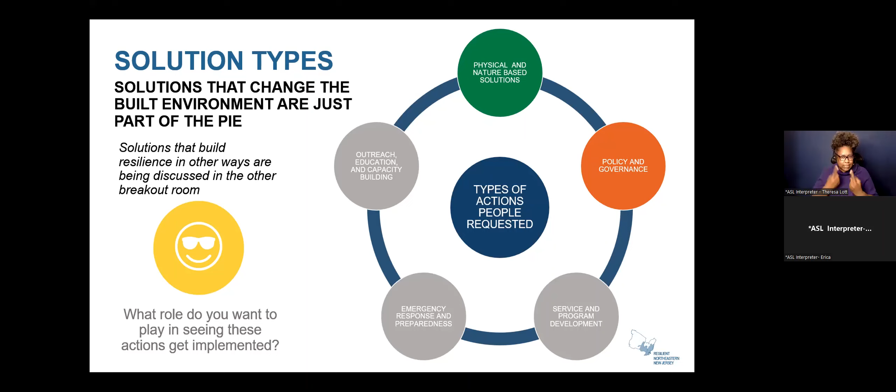You'll see here, we'll come back to these questions as we're moving through, but these are some of the prompts we have for you in terms of feedback and how we can further refine the recommendations moving into this action plan.

We want to know, does the stuff we've come up with jive with your vision of what a resilient future looks like for our region? Is there anything glaringly missing? Did we not hit the mark somewhere and you really want to name it for us? Hey, you really don't seem to have said X. Please name those things for us.

In some instances, they could be addressed somewhere else, and we want to assuage your concerns that we have identified those challenges as well in our analysis. What do you think is most important? What should we prioritize? And are there other areas where you have concerns about implementability, feasibility, cost, etc.? Next slide.

And so at this point, I will turn it over to Greg and Russ to share a little bit about how we are framing up these collections of solutions in the built environment space. Thank you.

Yes, thanks, Natalie. And thanks to everyone for joining. As Natalie said, we want this to be a very collaborative event tonight, an extension of the collaboration we've seen over the past year plus on this project itself.

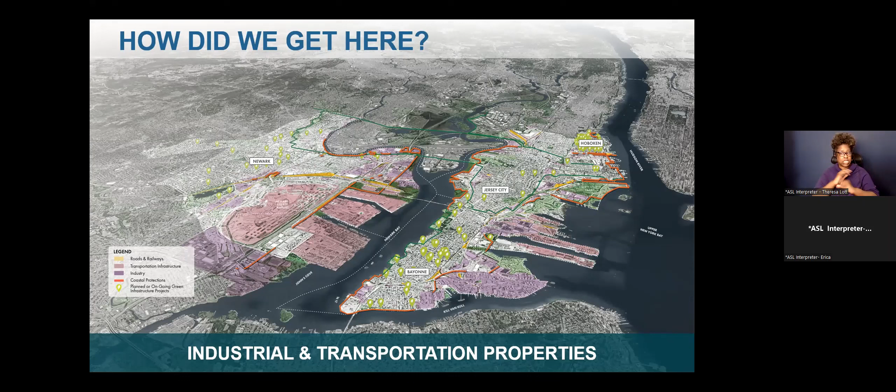What really comes out to us is that we have a lot of sections of the waterfront that are industrialized. Not only is transportation a really important aspect of this area, as Yasmin mentioned, but a lot of the properties along the waterfront historically have been industrial and remain in industrial and critical infrastructure uses today. That really influences not only how we think about protecting that area, but where we place that protection. Next slide.

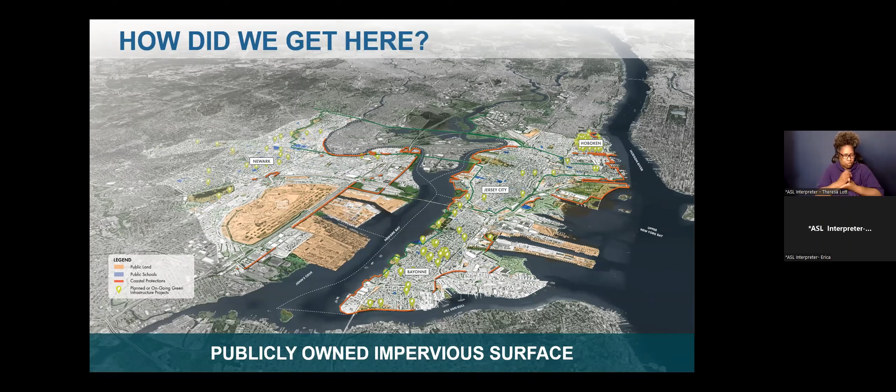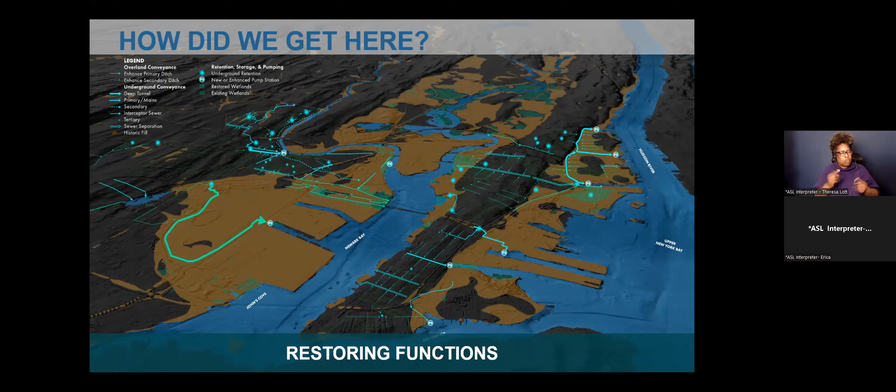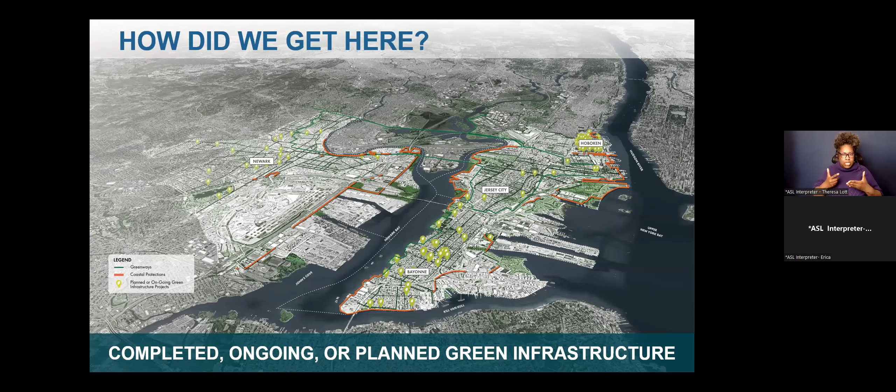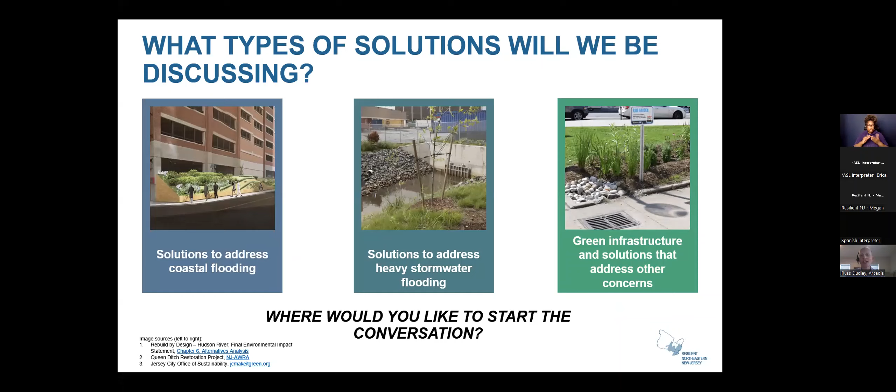Next slide. So what are we talking about today? Up to this point, through our other community meetings, we have talked about solutions oriented around three primary categories. We're responsible for addressing flooding holistically, and as mentioned before, that involves coastal flooding due to storm surge or sea level rise, but also stormwater flooding and groundwater flooding. So we'll be talking today along these similar lines: coastal solutions, drainage solutions, and green infrastructure.

At this point, I'll pause to allow a space to change if needed for interpretation, but also to give everyone a chance to choose where we start in this discussion.

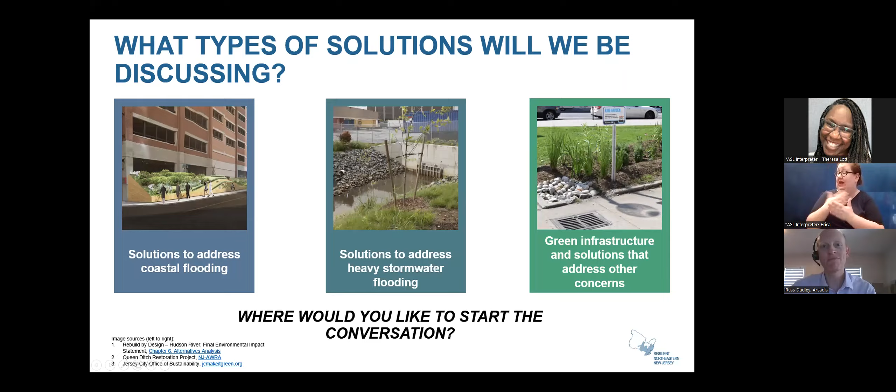Great, wonderful. So I'll kick off this discussion about our drainage solutions, and stormwater is certainly an important element of our resiliency plan, one we've spent a lot of time looking at and talking about. The visioning report kind of helped frame the types of solutions that we wanted to see throughout the region, but the risk assessment that we did as well, which will be presented shortly on the website, was a key element of identifying solutions for addressing stormwater flooding.

Stormwater flooding, as you all know, is particularly challenging because of the frequency and the geographic distribution of that flooding. It happens everywhere, and based on a lot of the storm events we've seen recently, especially from Ida last year, but also some storm events we've already seen this spring, it has resulted in localized stormwater flooding. So it certainly presents a specific challenge for us through this project.

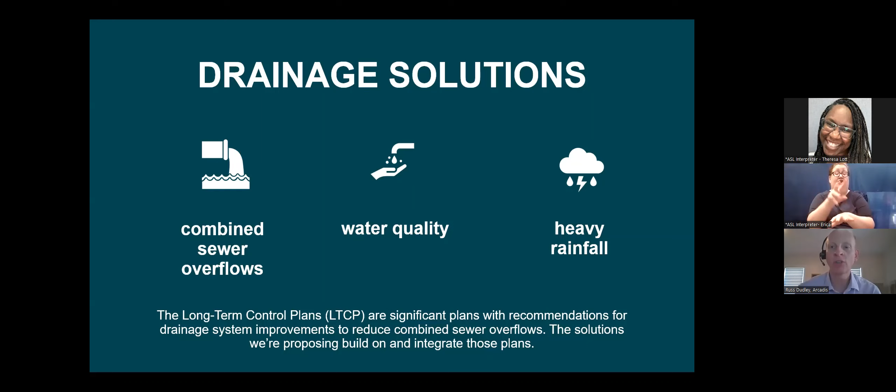Also, there's a lot of actions being taken for drainage solutions in the area. A lot of this is based around water quality, addressing combined sewer overflows. And there are currently long-term control plans that have been developed for the region to reduce these combined sewer overflows, which we have factored into our plans as well.

So let's start, Greg, by going through some of the drainage solutions. This is the draft recommendations as it relates to drainage specifically. You'll see all the solutions presented here, but we will work to step through these individual key actions to help describe this in more detail. And as it relates to some of that terminology we presented earlier, you'll see ease, protect, and connect as key elements as part of our draft recommendations.

So to begin with, this is how we're going to present our actions in our different categories. We have broken these out by similar actions, and we'll start by talking about separating stormwater to safe and dedicated outfalls. We looked for opportunities to get water out of the combined sewer system, with the understanding that a majority of our region is serviced by combined sewers that handle both stormwater and wastewater. These sewers are old and have varying capacity, and it's difficult for a lot of these sewers to handle the rainfall.

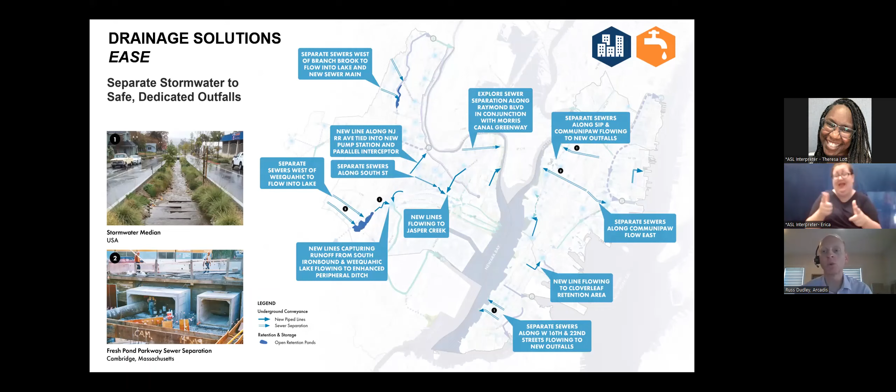So yes, this is an area where we were looking at the opportunity, and for a lot of these sewer separations, they're only beneficial if we can get water out of the system. That's why you'll see these areas being directed to the coastal areas. There's obviously a lot of infrastructure that we need to work around within these areas. So as it relates specifically to that area in Bayonne, taking advantage of the large right-of-way within those transportation corridors to potentially build in retention to those cloverleafs to help mitigate the amount of stormwater infrastructure needed to get water out. That's a theme of ours as we look at these types of projects. It's very similar to using the larger retention at Branch Brook Park, for example, to help mitigate those peak flows and allow us to get water out a little bit more efficiently as it relates to built infrastructure. So I hope that provides a little bit of clarification about that project specifically.

Just to reiterate, these have not been designed. We are still at a very much a planning level process, and some of these are intended to really kick off that conversation. A good example here are these deep tunnels. We know they can be disruptive and very expensive, but in some areas they'll provide a lot of benefit where we don't have many other great solutions to manage stormwater. One key element is a drainage corridor spine along the backside of Hoboken as well as Jersey City downtown, where a lot of flooding is occurring. These are examples of deep tunnel solutions that can help us manage stormwater and get it to places where it can be pumped out more effectively.

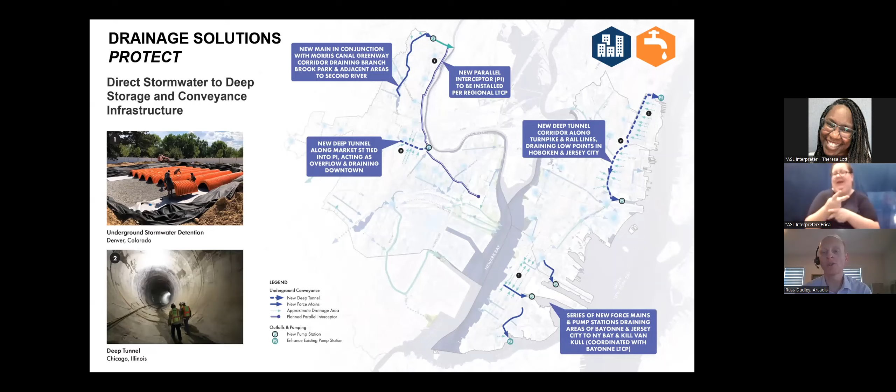Faith asked specifically whether those deep tunnels were combined or separated. In most cases, they'll likely be combined, taking advantage of the existing combined sewer where we can alleviate some of the capacity limitations within the combined sewer system. We'll also be able to store that water temporarily and then pump it back into the interceptor, for example in Newark, for treatment. Where we can, we'd love to separate that stormwater and get it out of the system completely, but there are other benefits of maintaining combined sewer tunnels from a water quality standpoint as well, so it does vary a little bit.

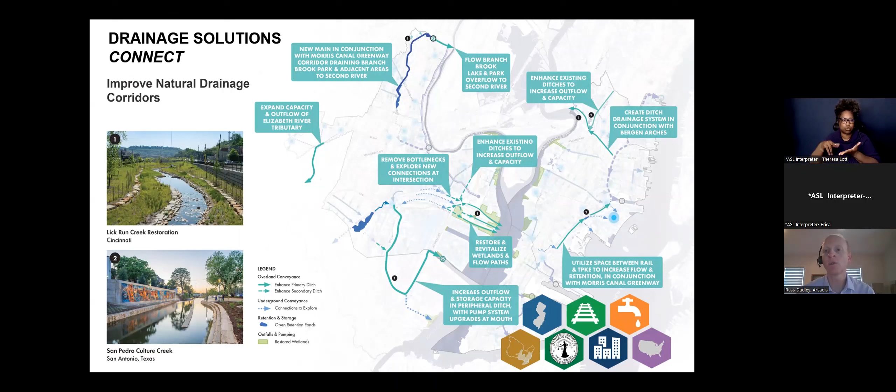To quickly move through these other drainage solutions, the next action we've identified where there's some really good opportunities is improving the existing drainage corridors throughout the area. There are a number of these around Newark, especially around Ironbound, where there's a large ditch system, as well as the peripheral ditch around Newark Airport. Improving these natural conveyance channels will allow us to get water out of those areas more effectively, and to identify existing barriers to flow and try to open those up to improve conveyance. This is perhaps a little more limited in Jersey City and Hoboken, but we want to take advantage of existing right-of-way and transportation corridors to identify open channel conveyance solutions that can move stormwater out of these areas to alleviate flooding. We'll talk about that more as it relates to the Newark Bay Hudson extension of the New Jersey Turnpike, but these are some solutions that allow us to leverage and improve those existing drainage corridors.

Adam spoke to an innovative idea to repurpose an underground parking lot. There's going to be a big need to identify lots of different regional retention sites throughout the area, so we often look at public properties and large parking lots to begin with for these types of practices. A good example is the Ironbound Resilience Hub, which we've advanced through a FEMA BRIC application as part of this program, where we incorporated a significant amount of stormwater storage within the Ann Street School in Newark, combined with solar power infrastructure there to create a resilience hub.

So I quickly moved through those solutions. I know we're a bit time limited, but Megan, I don't know if you've been tracking the comments, if there's any questions we should pause for.

This might be a good time to circle back to some comments that Lenny was making. Lenny, I wonder if you're able to unmute yourself and share some of your thoughts. To summarize briefly, there was a question about how regulations related to development, particularly in redevelopment zones where you can have stronger rules, and whether there was a way to use that system. It's a question for Russ and Greg, because this is the physical breakout session and we're talking about governance solutions that allow for physical breakouts, or are things around land use and redevelopment laws specifically being discussed in the other breakout?

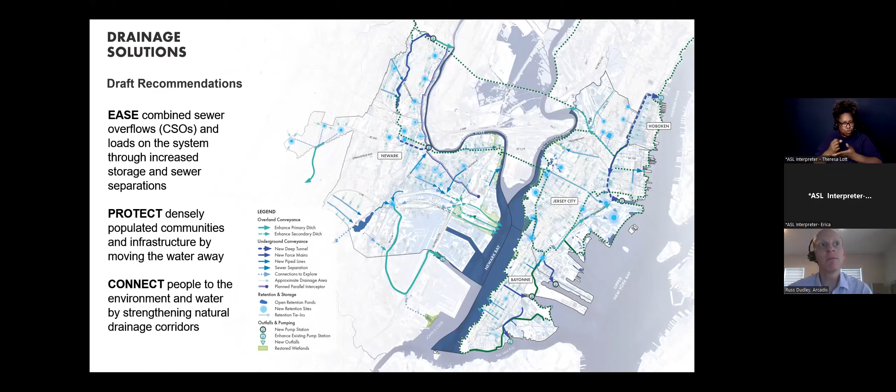In the interest of time, we can circle back to some of these comments, but for those who need to sign off potentially here shortly, maybe Greg, you can talk about some of the green infrastructure solutions and approaches that we've taken.

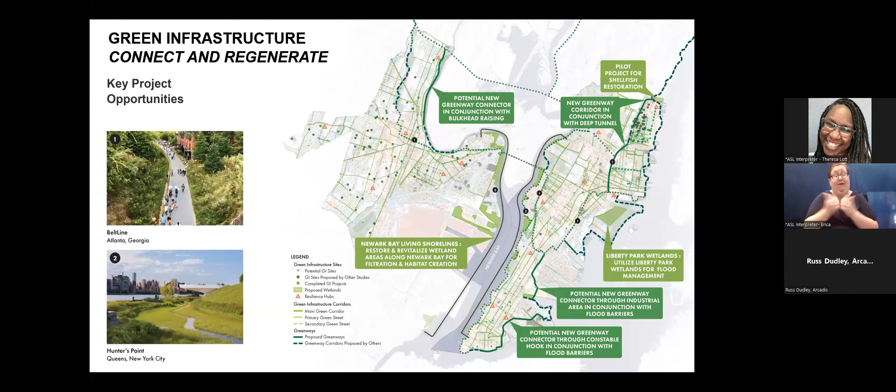So the way we're looking at how Northeastern New Jersey can help with green infrastructure projects in the region is by identifying areas where these projects can have impact. I'm going to step through a series of maps that outline different inputs we've identified that can help both site and develop green infrastructure projects going forward.

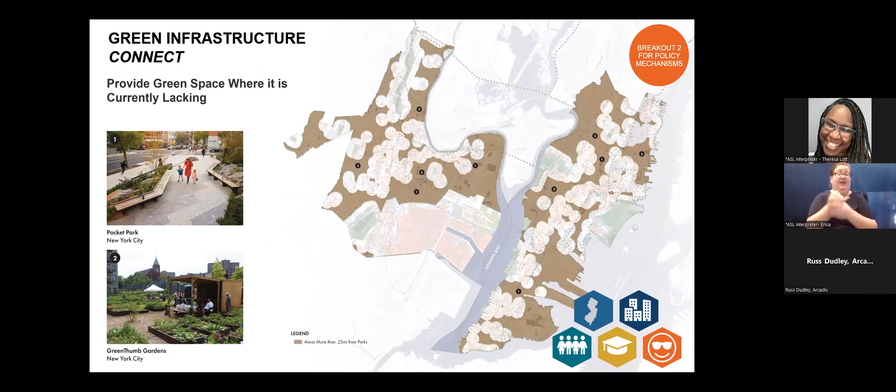One of the main factors we look at is how far people are from existing parks and open space. We generally consider a quarter mile radius to be a feasible walking distance to a park. As you can see on this map, the brown areas represent where people are more than a quarter mile from an existing park, so where an intervention can have a greater impact on access. Though space might be limited in some of these areas, we see interventions like pocket parks, community gardens, and public-private open spaces helping to fill some of these gaps.

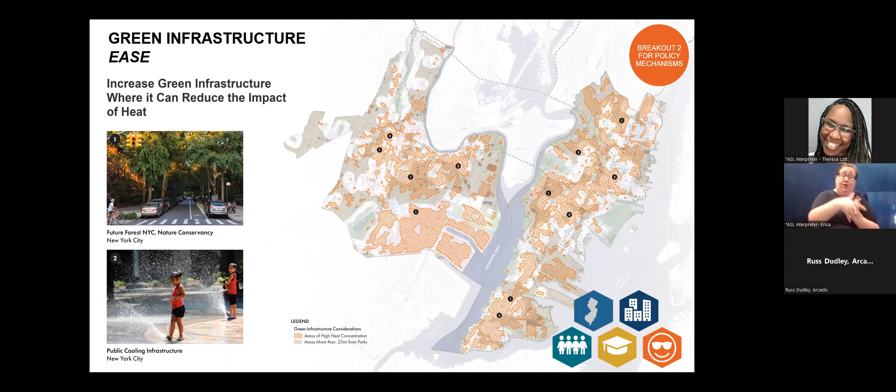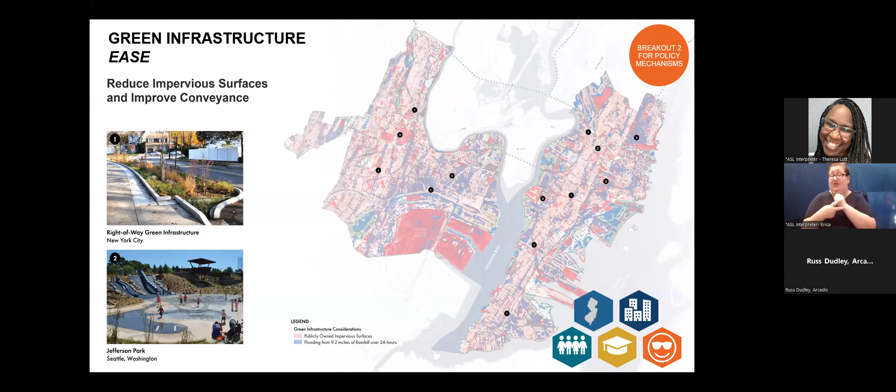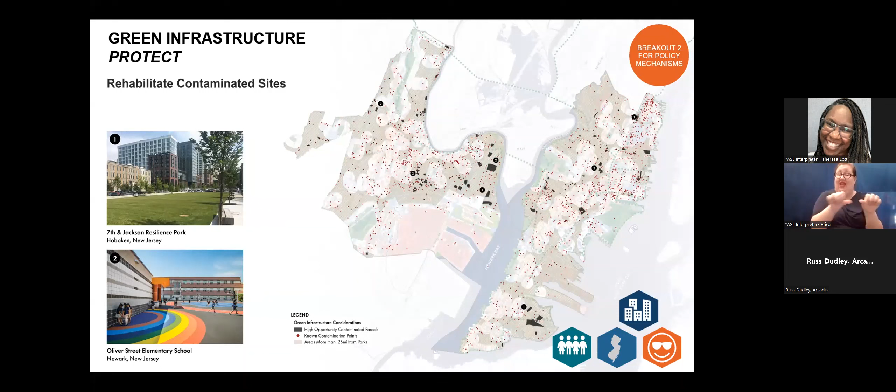So I guess at this point, 3 minutes over, I can open for comment. I have seen a few going through the chat. Are there any that have risen to the top? Yeah, I've been looking through the chat as well while Russ was speaking. Any questions on the green infrastructure solutions and approaches that we've outlined here?

So as a wrap up, we see this more as a roadmap to hand off to the cities, state and federal agencies, et cetera, when they are trying to install more green infrastructure or site it. They can know the inputs and the factors affecting that area that this green infrastructure can address.